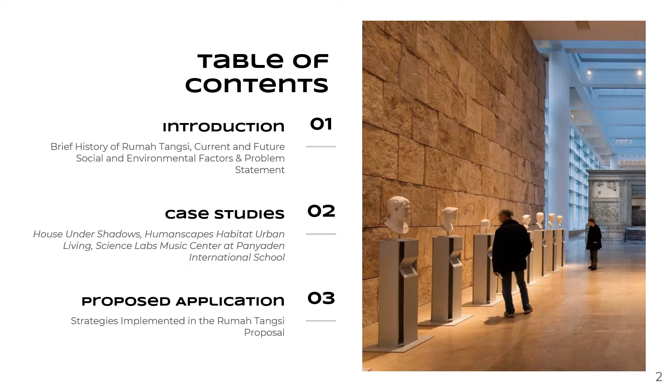This is the table of contents. First I'll be doing the introductions, then going on to the case studies and the proposed application.

The purpose of this project is to basically turn the existing space of Rumah Tangsi into a cultural gallery that can be shared with various populations without bringing down its heritage value. For my problem statement, I decided to counter the issue of fast fashion and fading culture in Malaysia by designing and creating a space that is more recognized and appreciated by the local community.

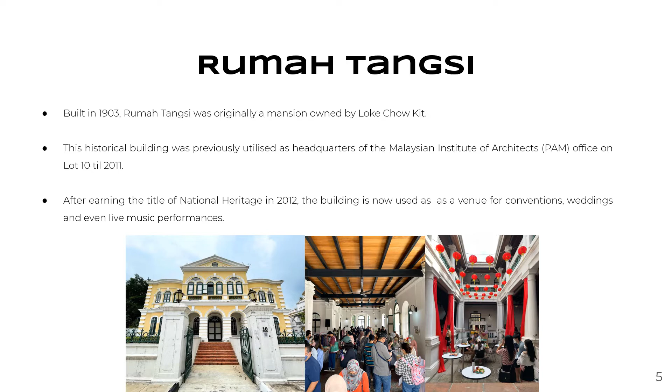Rumah Tangsi was built in 1903 and it was originally a mansion. Right now it's a national heritage site which is also used for conventions, weddings, and even live music performances.

As for the current trends, I basically briefed the whole site analysis, talked about the weather of the place, how its traffic is leading to noise pollution, air pollution, and how the weather may pose a threat to the materials, and the humidity from the vegetation may also weaken structural integrity over the years.

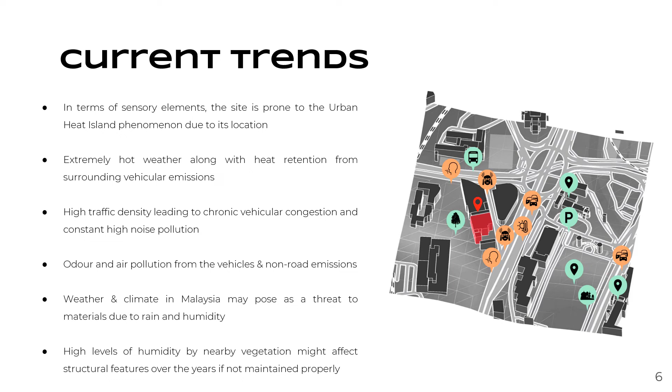For the future trends, I talked about how COVID-19 has brought changes to businesses and how spaces operate. This can also affect social activities around the area, and demographically it's unlikely to change because it's a heritage building and the businesses and people haven't changed for a long time. So we may need to bring in a target or niche market to attract a wider demographic.

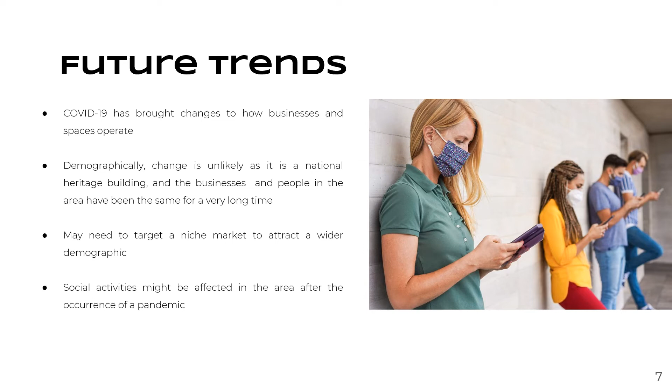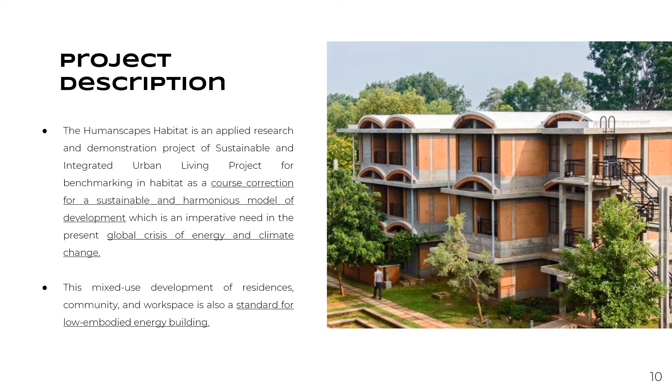Going on to the case studies. For case study 1, I'll be talking about Humanscapes Habitat, urban living in Auroville, India. This project is basically made to serve as an example and a standard for low embodied energy buildings in India, to combat the global crisis on energy and climate change.

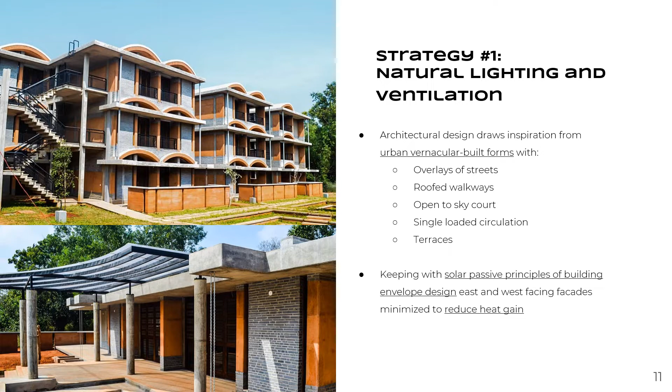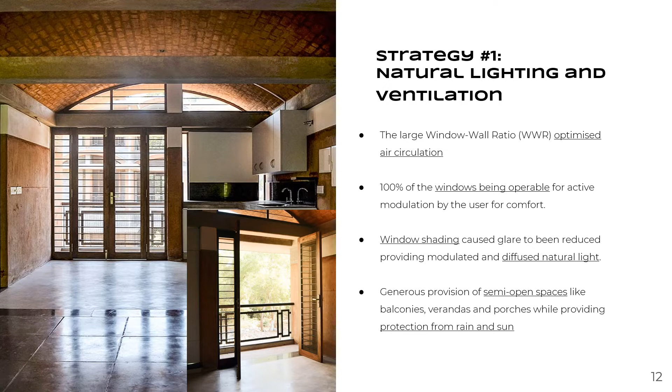They take inspiration from urban vernacular architecture and use a lot of very open spaces, allowing air and sunlight to emit through while reducing heat gain. The large windows optimize air circulation and are all operable for users whenever they want. Window shading creates diffuse natural light, while semi-open spaces protect from rain and sun.

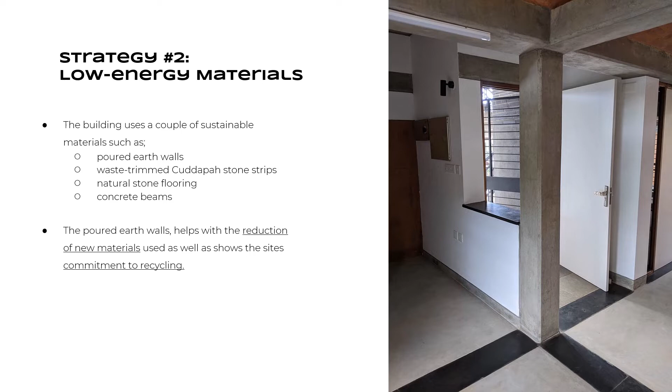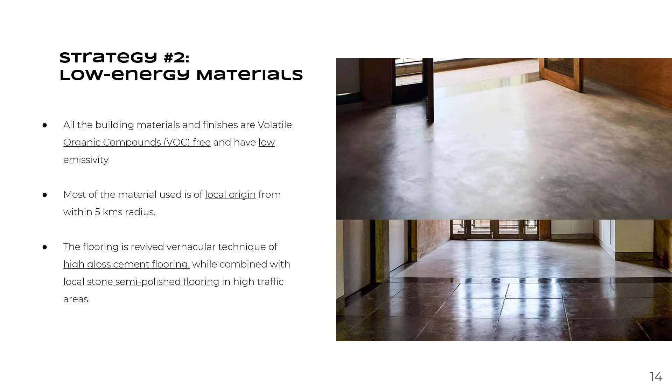The building also uses a lot of sustainable materials taken from the site itself, reducing the need for new materials. The local building materials they use are VOC-free and have low emissivity, and they use a vernacular technique to revive the flooring. For finishing, they don't use any industrially processed materials, instead bringing out the natural textures of all the materials.

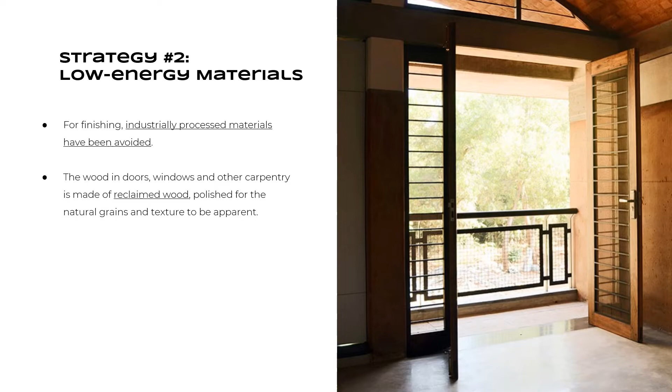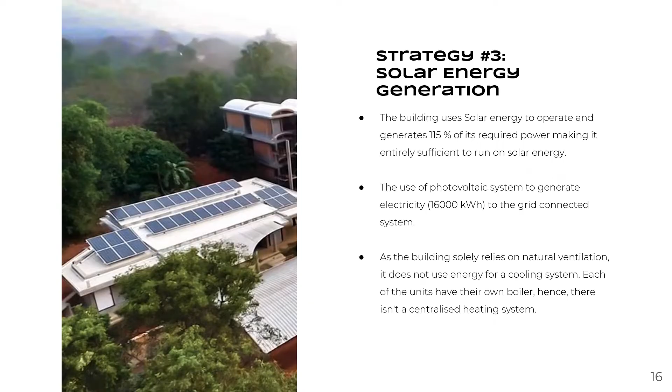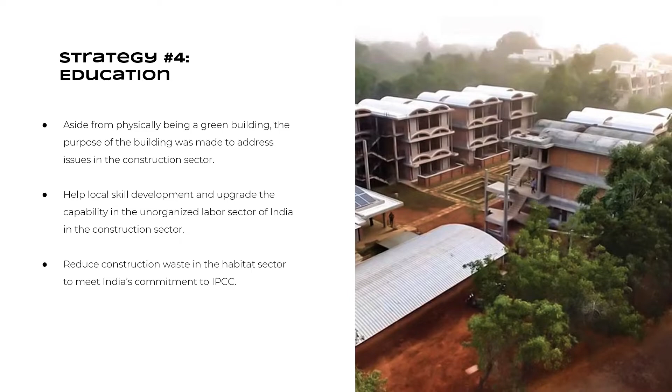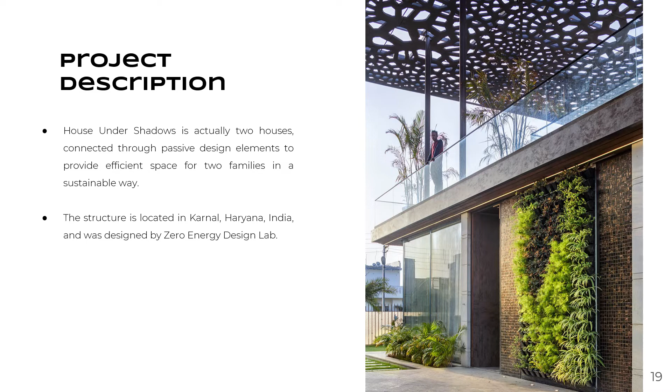Going on to the next case study, House Under Shadows. Located in India, this building is actually two houses under one roof for two families to live in a sustainable way. In this strategy, the designer was asked to make a space where two families can live in close connection to each other while still having a sense of privacy.

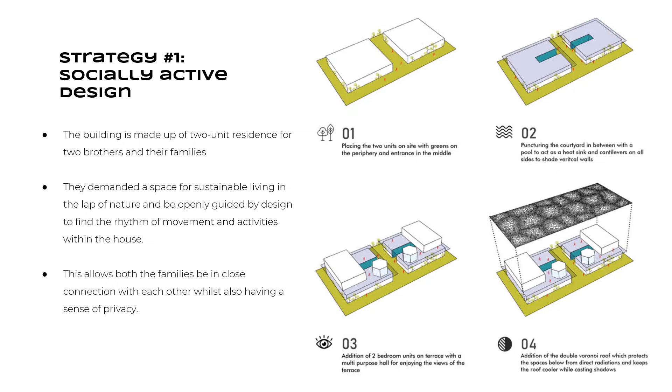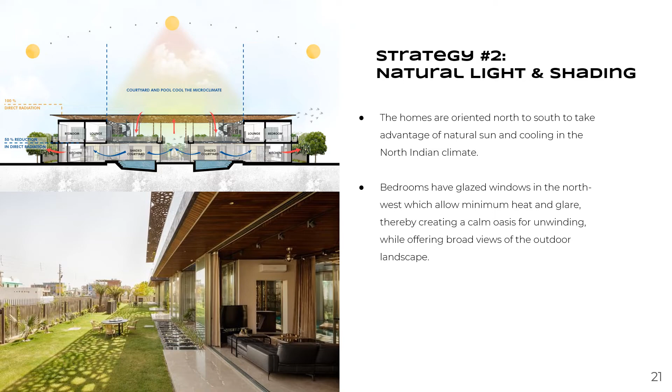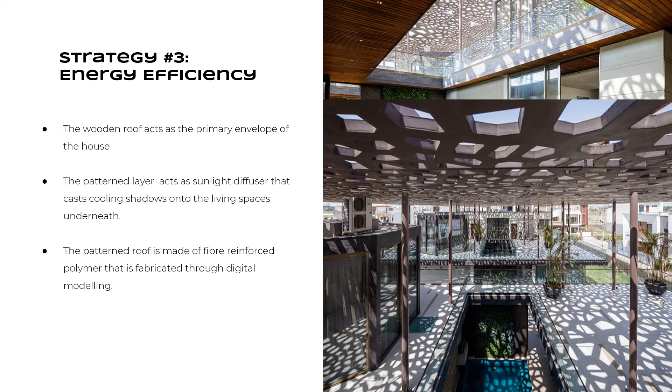The homes are oriented to optimize sunlight and cooling features, and the bedrooms face away from the sun so they don't get heat or glare. The most striking feature of this place is the roof, as it has these patterned roofs that diffuse the sunlight.

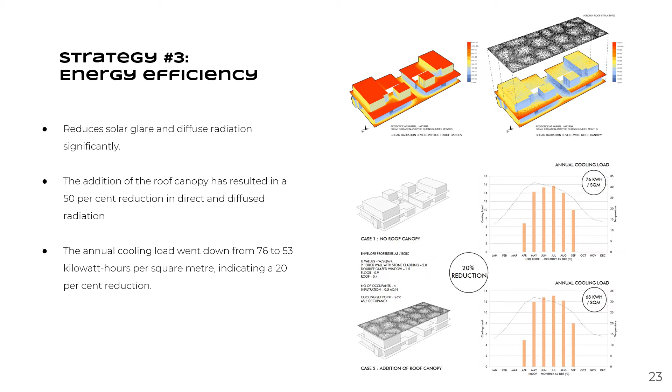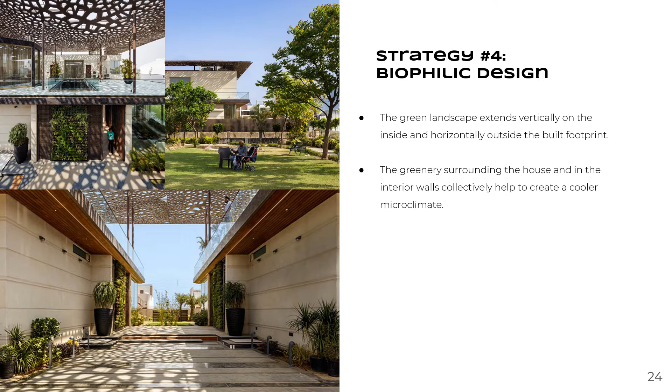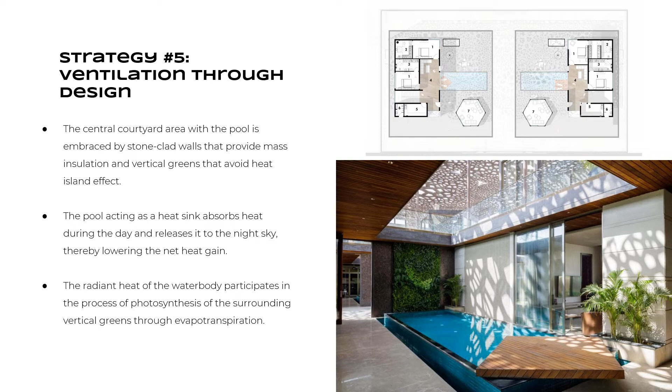This roof has allowed the place to have a 50% reduction in direct and diffuse radiation. They also implemented biophilic designs outside and inside the house, which creates a cooler microclimate. They also designed the place to have a pool, which acts like a heat sink, absorbing heat throughout the day and releasing it during the night. This also affects the ventilation of the place.

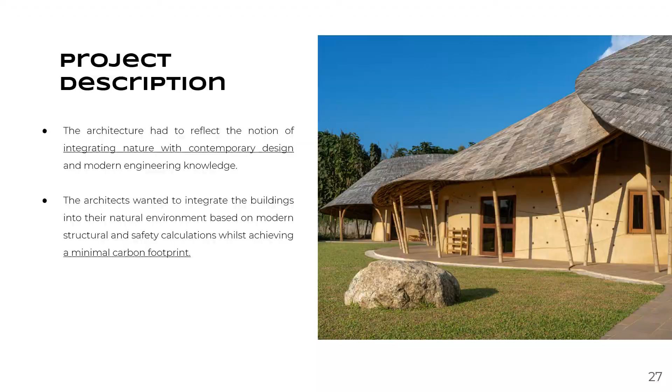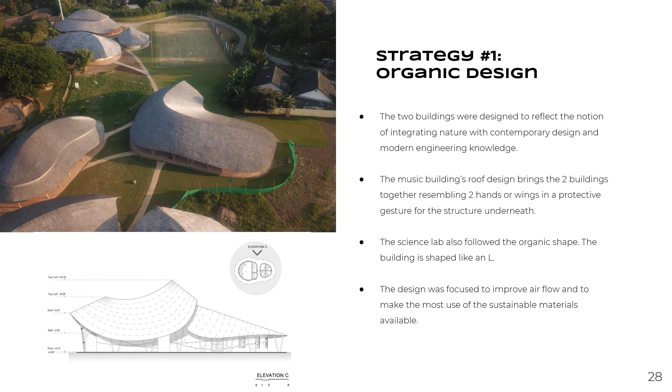Next case study is Science Labs and Music Center at Panyaden International School, Chiang Mai, Thailand. In this project, their aim was to integrate buildings into the natural environment using modern engineering knowledge while achieving minimal carbon footprint. They are built with an organic design following the shape of an L, which improves the airflow into the building. They use very durable, low-E materials such as bamboo for the roof structure, which also provides an absorbing panel for the music building.

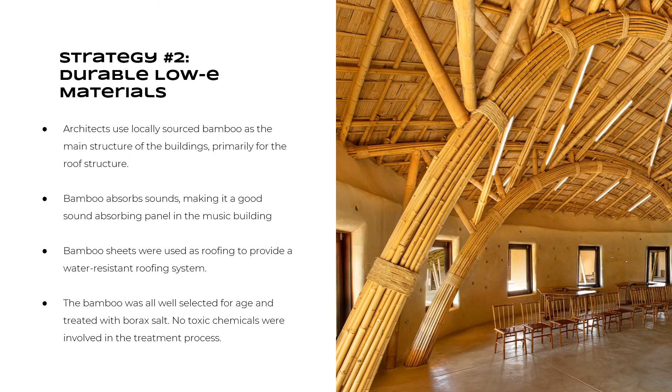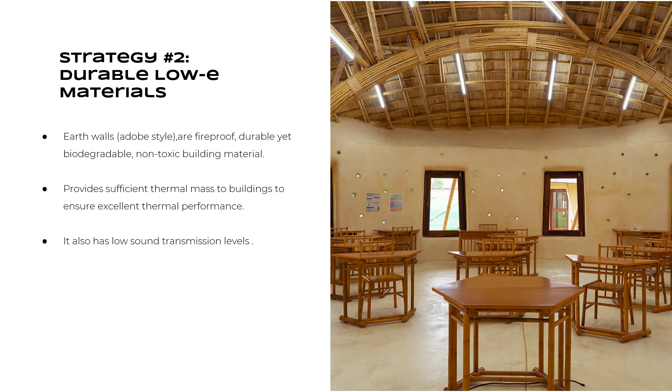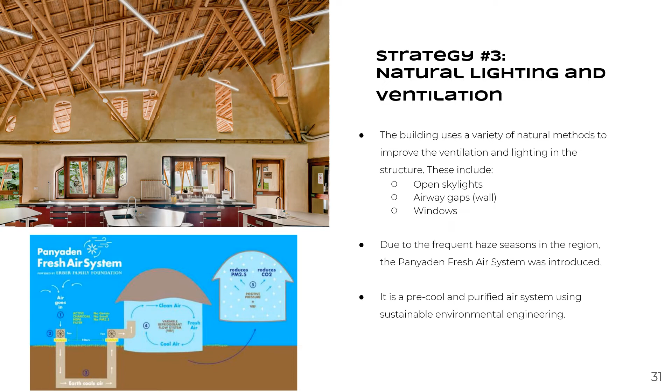They also have durable yet biodegradable earth walls, which provide good thermal mass for thermal performance. They have ventilation features such as open skylights, airways, and windows, and their own fresh air system supplied throughout the whole structure. They also have sustainability teaching programs throughout the school, encouraging students to learn sustainable values and motivating them to build awareness and knowledge and take action.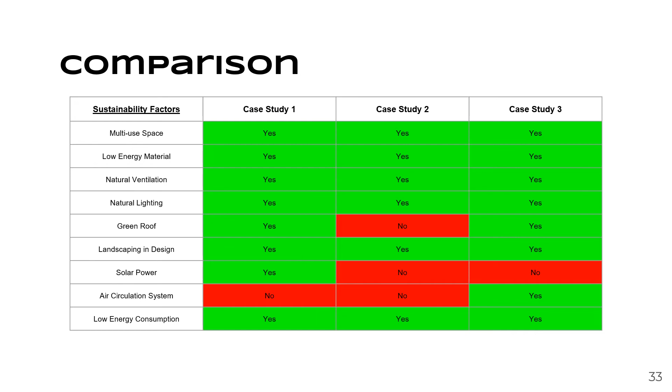Moving on to the design application. The building is a multi-use space - not only a gallery but also a bar area, workshop, and retail store. This range of functionality helps attract a wider audience to the space, which helps attract more business to the site and surrounding areas. Overall, this economically benefits the area.

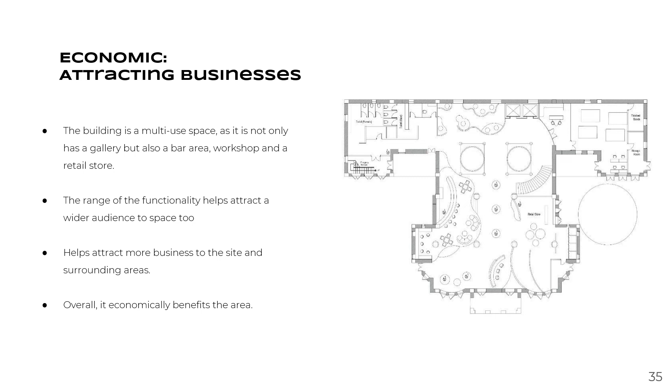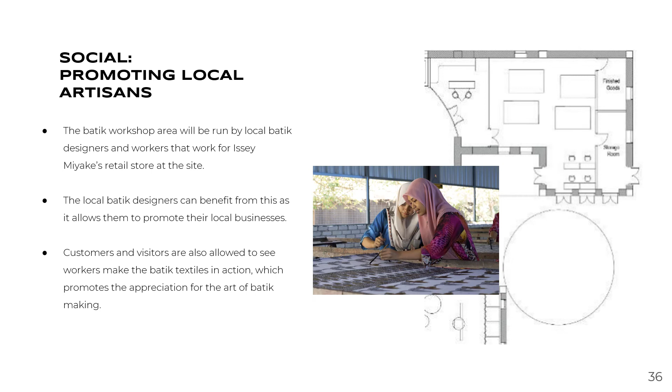The batik workshop area will be run by local batik designers, helping them promote their own local businesses. Customers are also allowed to see the workers in action making batik textiles, which in turn promotes appreciation for the art of batik making.

I also plan to implement photovoltaic cells in order to generate electricity, which can help cut down on electricity and energy costs throughout the structure. I plan to use monocrystalline cells as the type of solar panel.

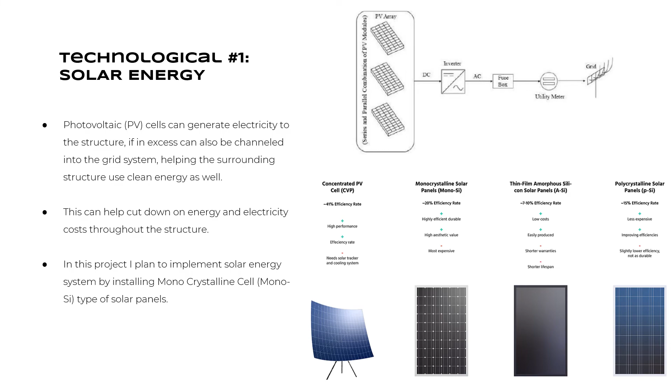Heat and glare was one of the most noticeable issues I felt during the site visit. In order to battle this issue, I proposed the use of ventilation blocks and a slatted facade. The thin layer of ventilation blocks will reduce the glare, and the slats would also protect the whole building structure from UV radiation while providing extra shading for the user.

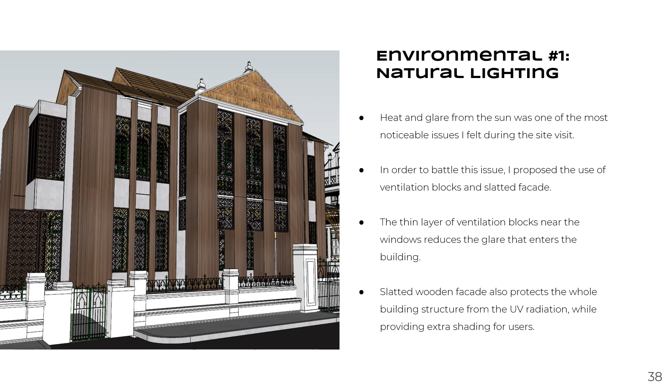Natural ventilation is also important as it reduces a lot of electrical costs in the long term. For this project, I use ventilation blocks throughout the facade to reduce heat gain, and they are very easy to install and construct with no maintenance required.

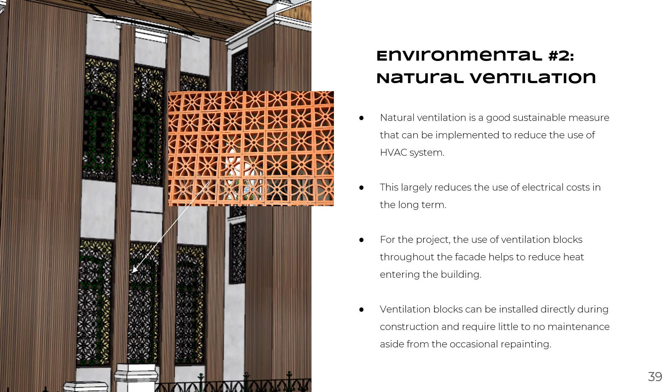The vernacular design elements implemented on the facade and interior also maximize natural ventilation. Implementing atap roofing, which has low thermal capacity, gives good insulation against heat. The ventilated roof space helps to cool down the upper floor. Open interior spaces with minimal partitions on the ground floor allow good ventilation and air circulation in the interior.

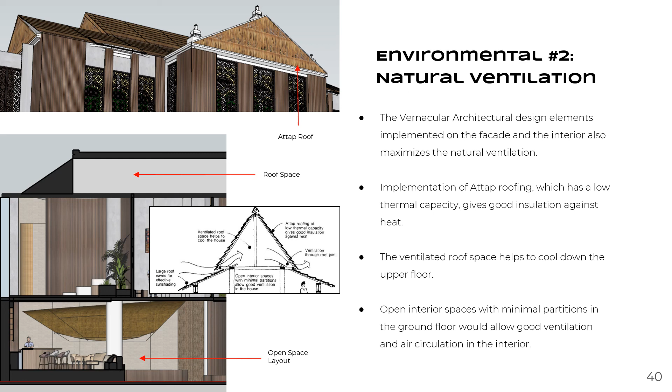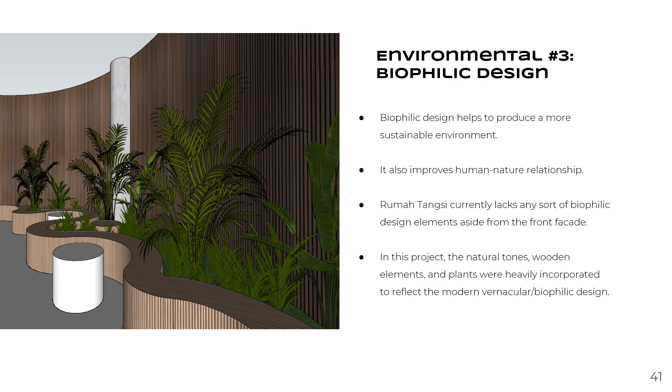Since Rumah Tangsi currently lacks any sort of biophilic elements, I decided to implement a lot of plants and biophilic design because it makes the place more sustainable and improves the human and nature relationship as well.